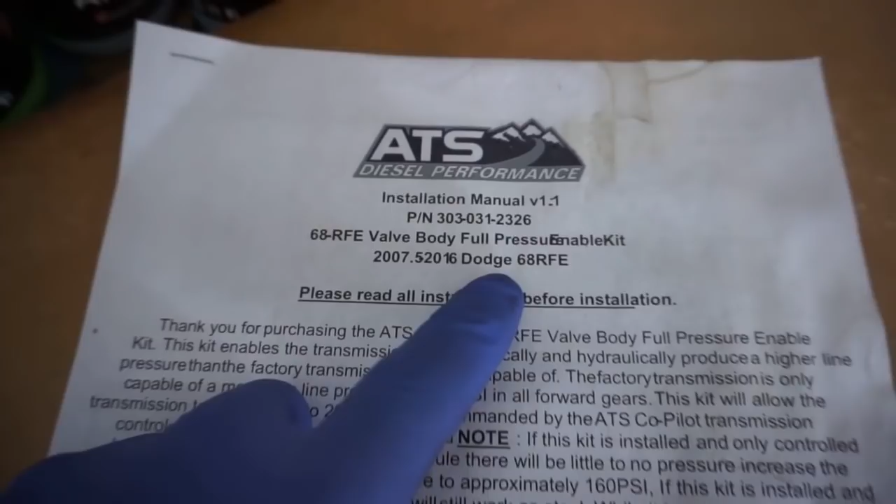What this is going to do is allow us to command up to 295 psi of line pressure for your transmission. I'm going to explain in a second why that is pertinent or relevant.

But right now, as you can see, we have the gasket here. We have a metal plate here, and then underneath that one, there's another gasket. I'm not going to mess with it right now just because I'm not ready to mess with it. We also have an accumulator plate — I believe this is an accumulator plate for the valve body.

Actually, it might be called something different, but ATS, for those of you that know, they're based out of Colorado, all American made, in-house R&D, research and development. Excellent company, I've heard a lot of good things about ATS. This is the first ATS component I'm installing on my truck.

But check this out, I mean come on now — detailed colored instructions, it doesn't get any better than this. You guys know how I'm very big on good instructions and color, because for example, when we did the AMP steps, the pictures were in black and white and it looked like it was typed in China.

But anyways, we're gonna talk more about this when we take the valve body off and have it sit here. Right now, what I want to do is show you guys what else we have, because this will require some stuff. So right now you see a bunch of stuff here.

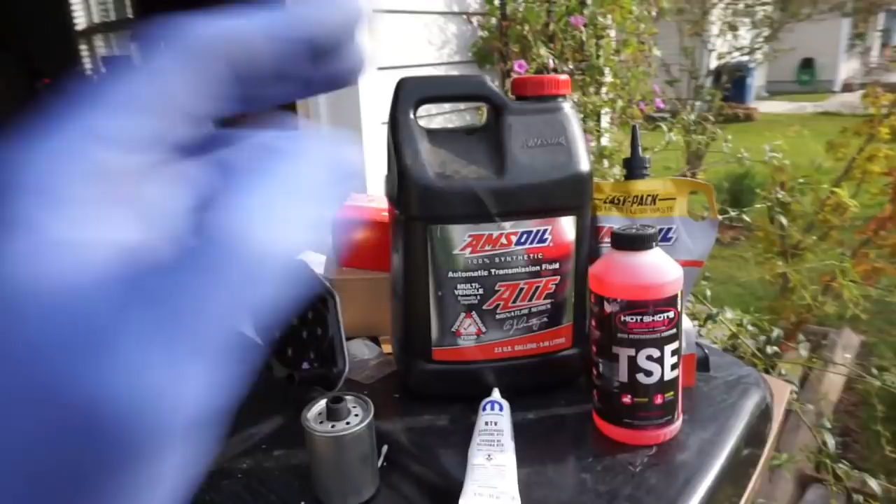We got transmission fluid from AMSOIL, Hot Shot's transmission additive, and another bag of AMSOIL synthetic transmission fluid. If you did not know, 68RFEs take ATF4 transmission fluid. So if you don't want to get the AMSOIL, you can go to your local parts store, Walmart. I've read on forums dudes running SuperTech ATF4 fluid, and it meets OEM specs, so they say they've had good success with it. Don't freak out now.

Yes, I have Hot Shot's. A buddy of mine gave me this because I told him I was about to do this job, and he was like, hey man, you should put some of this in here.

Reason being is because we're dropping the pan, so we're changing the fluid as well. We're not doing a full flush. Only reason why is because my truck runs really good, my transmission is really good. I have no issues with my transmission and it's been holding up like a boss. But there is dirt in there, I'm sure there's dirt in the cooler and stuff like that.

What this is supposed to do is break down all of the dirt and sticky friction and all that crap. It's supposed to break it down and clean it. They say to add it when you change your fluid, so we're gonna do that today, add the specified amount.

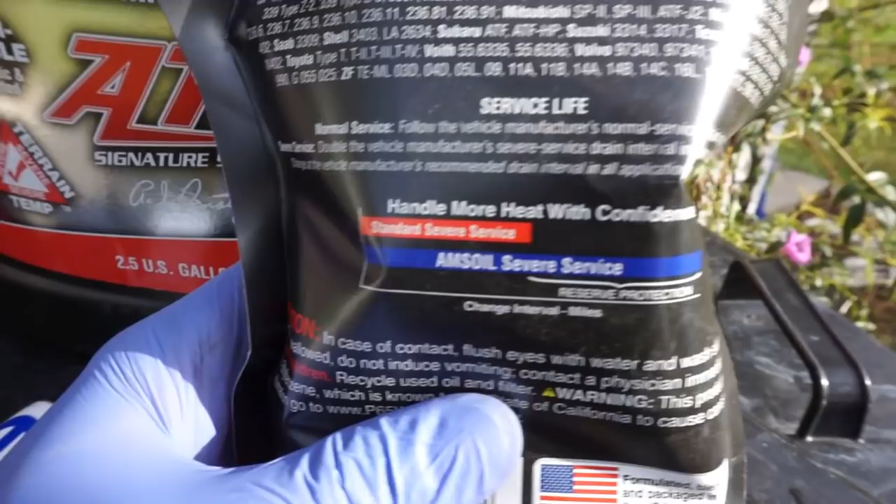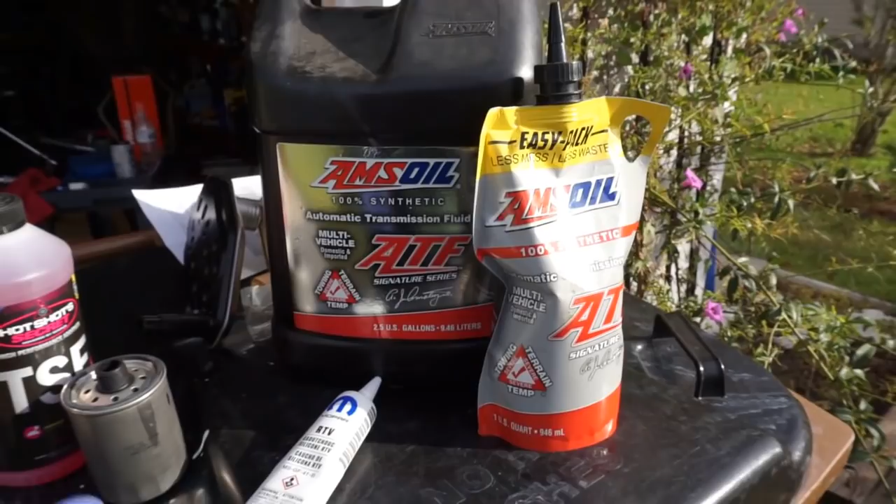But you guys do know that dear to my heart is AMSOIL. AMSOIL ATF fluid is severe transmission fluid, so what that means is, long story short, you get pretty much doubled the severe service life. I believe on the 68RFE recommended transmission intervals are either 60,000 or 100,000 miles, I don't really remember, but you get double the life. It's 100% synthetic, really good stuff.

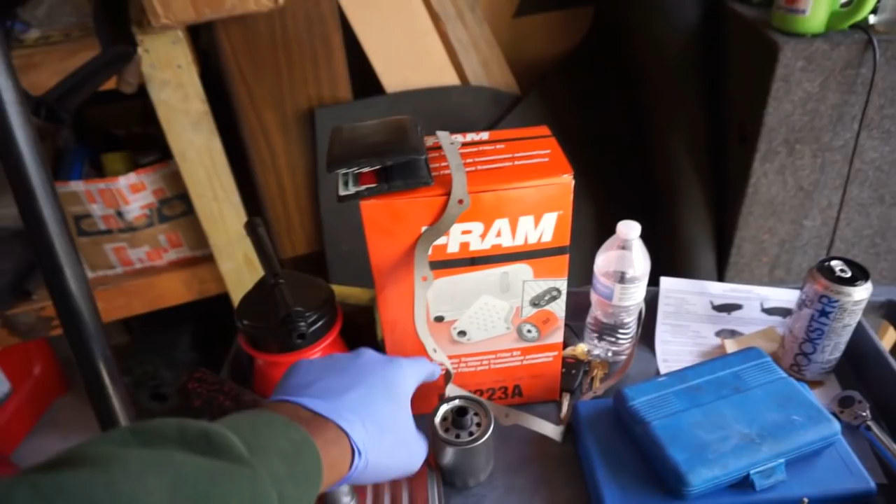First things first, over here, I bought this filter kit a long time ago — not this part, but the two filters. I bought this a long time ago when I originally ordered the separator plate, because I was going to do it way back, and then I had a bunch of stuff come up.

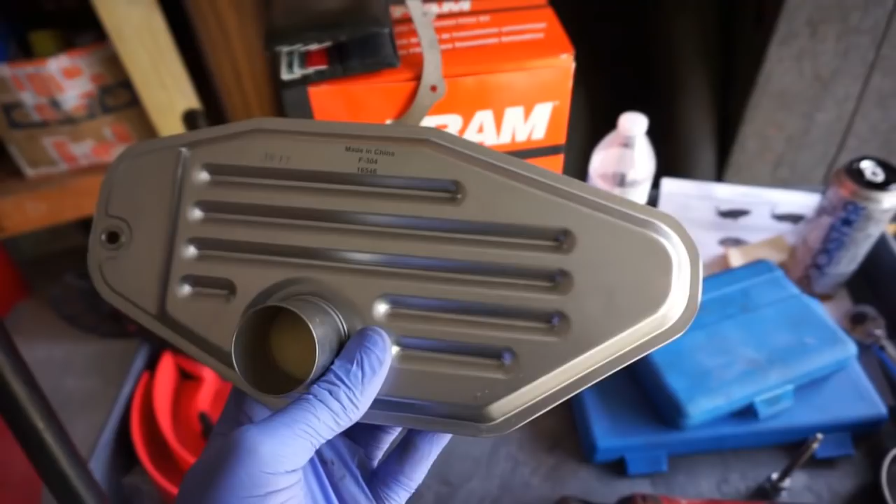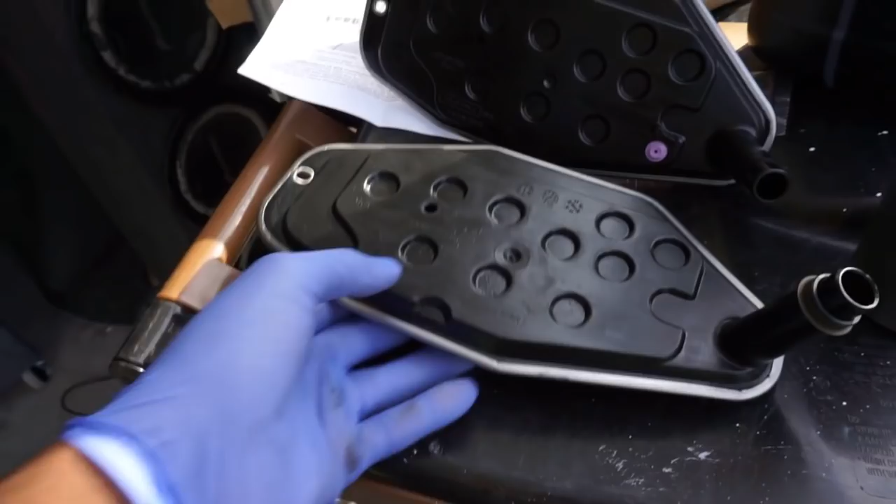Right off the bat, okay, this filter is made in China, okay? It looks very similar to the pan filter, right, the Mopar one. When you get them side by side there is a huge difference within these two filters. Right off the bat, when you're looking at this, the Fram filter is crap. I mean, the glue looks like it's gonna fall apart the minute it heats up. You come over here to the Mopar one, it's clean, smooth plastic. The big thing, the Mopar filter has what looks like some sort of snubber slash maybe like a check valve or a relief valve, some sort. Nothing on this one, okay? So already off the bat, this does not look right.

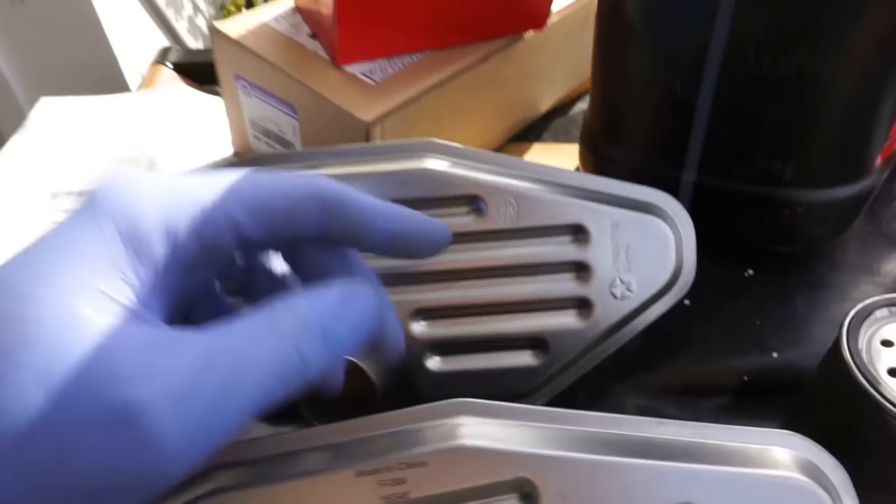On the other side, it says made in China. Mopar side, it doesn't say made in USA, but it does have the Chrysler stamp, and it just looks better. I mean, this right here looks cheap, okay?

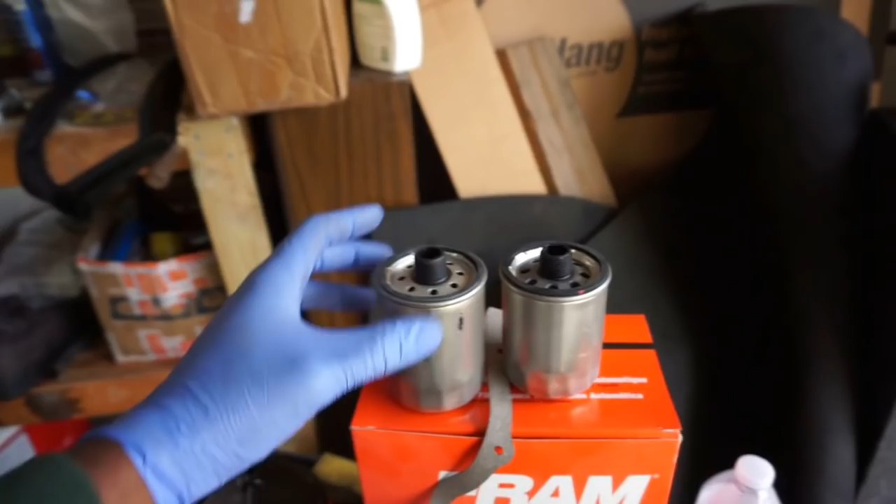That's two right there. Now when you come to the spin-on filters, if you have a two-wheel drive and a four-wheel drive transmission, they're different, okay? Your two-wheel drive filter is gonna have a shorter filter, your four-wheel drive transmission is gonna have a taller filter. This is supposed to be a 4x4 filter, okay? When I bought this online a while ago it said 4x4, 68RFE. Tell me right now if that looks the same height, okay? No, it's not, it's shorter, which leads me to think either they just cheaped out for a 4x4 filter, or they put a two-wheel drive filter in it.

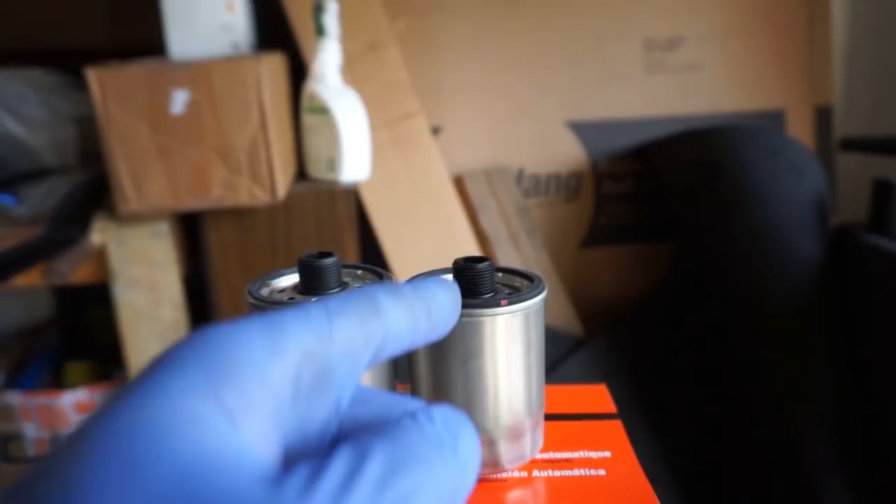When you come over here, this one — well, it's kind of blurry, but there you go — made in the USA, okay? This one, you probably can barely see it because they stamped it like an idiot, made in Mexico. So this is crap, we're not messing with this stuff. This is exactly why I say stick to OEM, Mopar brand filters, etc., if you can.

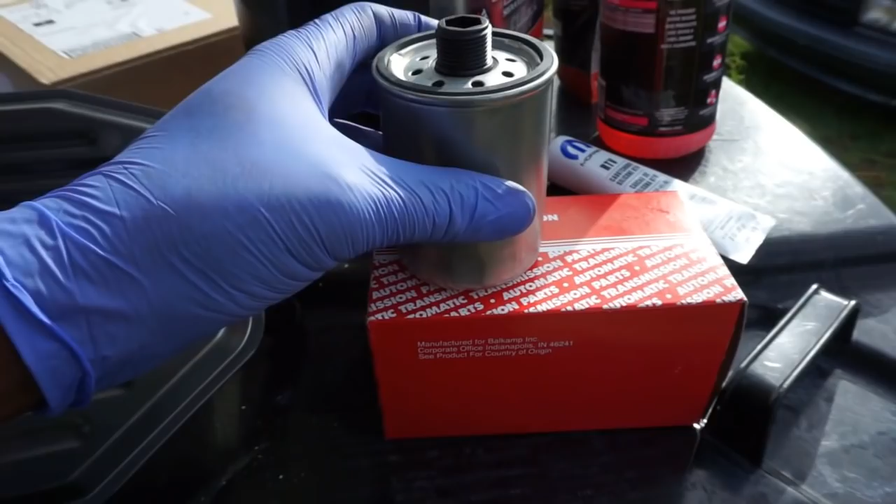Now, this is not a Mopar filter. This is a Napa filter, but it's made in America. I was trying to get a Wix filter because the Dodge dealership was out of stock on these, and I needed one today because they wouldn't have it till tomorrow. This is a Napa filter, but by just doing that simple comparison, I know for a fact this is going to be okay.

I'm not a fan of putting cheap stuff in. This right here, I mean, go over there to recycling, because that's where it's going to go. Get recycled, maybe turned into a soda can or something. I'm just really big on that. So this is a very, very important part. You guys do not want to cheap out and take the shortcut.

Yes, you can get a spin-on filter and a pan filter at the hardware store or the parts store for like 26 bucks, both of them. Don't do it, okay? Unless you get the Napa one here. If it don't say made in the USA, I ain't messing with it, okay? Especially when it comes to internals on the truck.

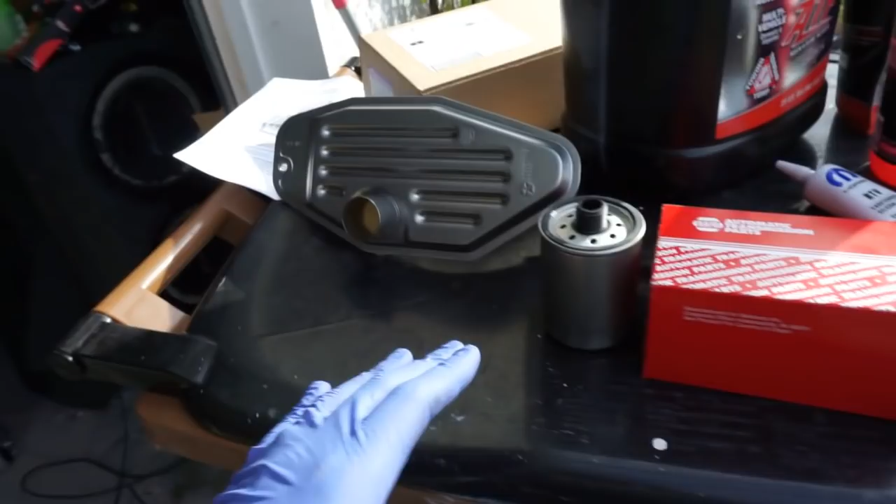So we got that. Tools needed for this job. You're gonna need very minimal stuff. You're gonna need an 8mm socket to take off the pan. It's 15 bolts. I highly recommend getting a magnetic pan so you can just drop all your nuts and bolts into it. Harbor Freight, it's like $1.

You will need a torque wrench to torque the pan back on, and also for what we're going to be doing with the valve body, you're going to need a torque wrench in inch-pounds. So this is a Harbor Freight 20 to 200 inch-pound torque wrench, which is perfect for what we need.

You're going to need a Torx 25 key to take off the pan filter, and you will also need a Torx key to take apart the valve body.

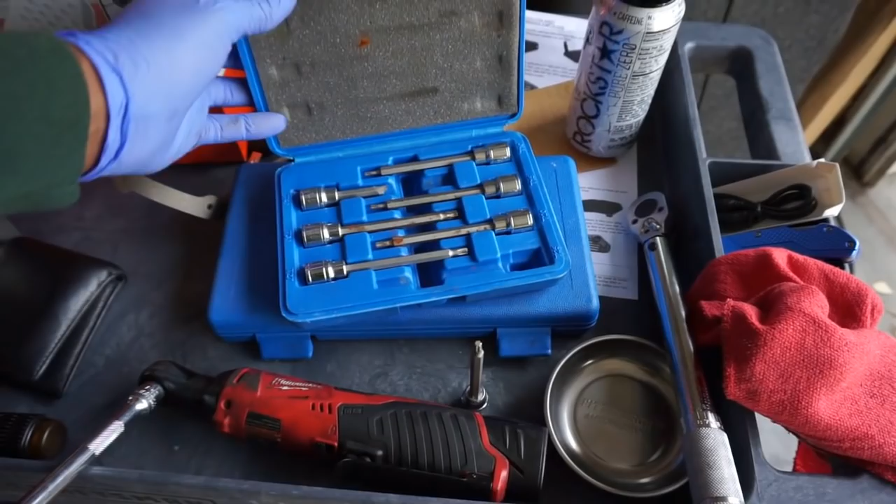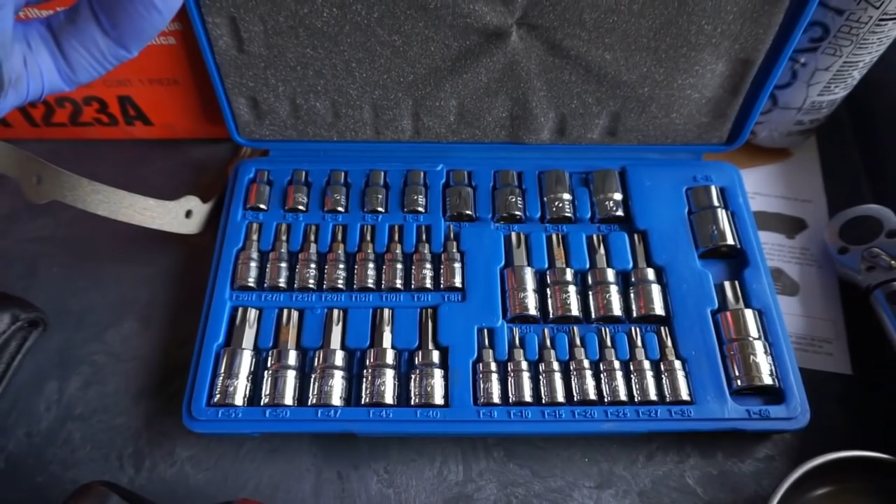You can go on Amazon, and this is where I got mine from. You can get these Torx key kits for super cheap, because for some reason at the stores Torx keys are super expensive. I think I got this one on Amazon for like 10 bucks, and then I bought an even better one with more sizes and different drives, like 1/4 inch and 3/8 drive. That one was about 20 bucks on Amazon. So highly recommend getting you guys one of those.

Okay, so what we're gonna do now is drop the trans pan. I got the truck up to operating temperature. When I shut the truck off about 20 minutes ago, the oil temp was at like 130 degrees, which we should be fine with. I got a drain pan over here, and then I got a creeper.

You guys see that? Yep, we got a creeper my wife bought me for my birthday, so I'm gonna be testing that out today. Now it's gonna be kind of hard for me to film and be underneath there at the same time because I don't have a camera mount that can get under there. Plus my camera's kind of expensive, so I don't really want to get it near all that oil and stuff to mess it up.

So, you know, I'm pretty sure you guys can take off a transmission pan. It's an 8mm socket, 15 bolts, take them all off. Once all of them are out, the fluid will come out, so make sure you're prepared when you take the last bolt out, okay? So I'm gonna go ahead and take the pan off and show you guys what it looks like once the pan is taken off, all right?

So check it out, bottom of your 68RFE, okay? So there's that, there's your pan filter, and there's your spin-on filter. Spin-on filter comes off just like an oil filter on your engine. Just spin it off. If it's tight, you can get an oil filter wrench on it.

Pan filter, all you gotta do is take off that Torx 25 screw, take that out, pull straight down, because there's a snout up here that goes into the bottom of the transmission or wherever. You want to pull straight down, don't pull forward, don't pull back, just straight down. It should pop out. Now there's a seal around that snout.

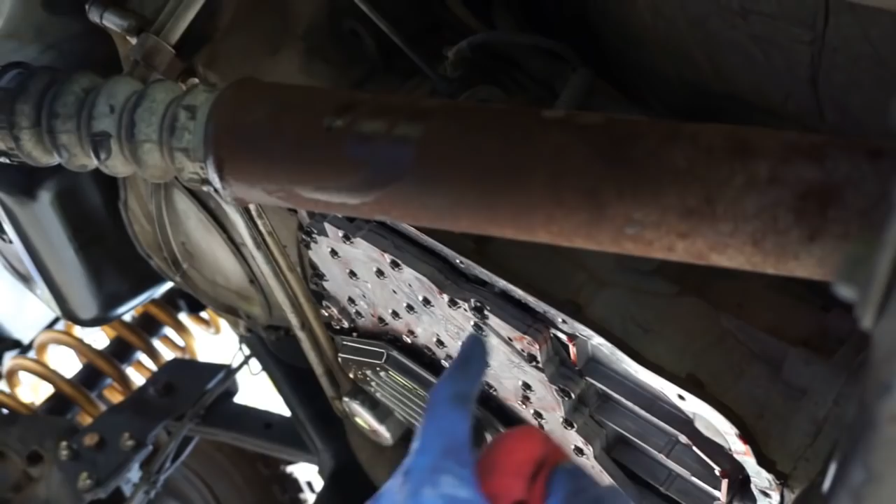If the seal is in there, don't mess with it, leave it alone. You can just put the new filter in and leave the seal. I've read from a bunch of transmission guys, and on the forums everywhere, they say it's perfectly fine as long as the seal's not destroyed. So shine some light in there. It's perfectly fine to reuse the seal for that. There's no issues with that, because apparently it's a pain in the ass to take off, and usually it requires some sort of special tool.

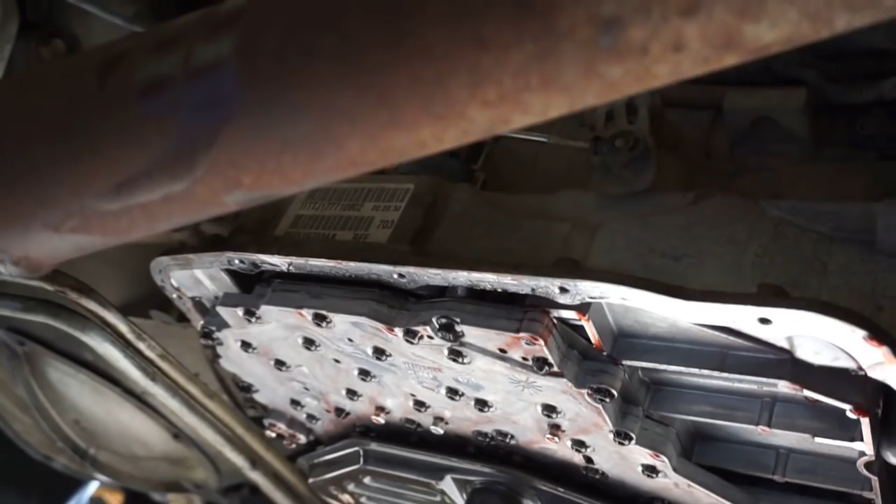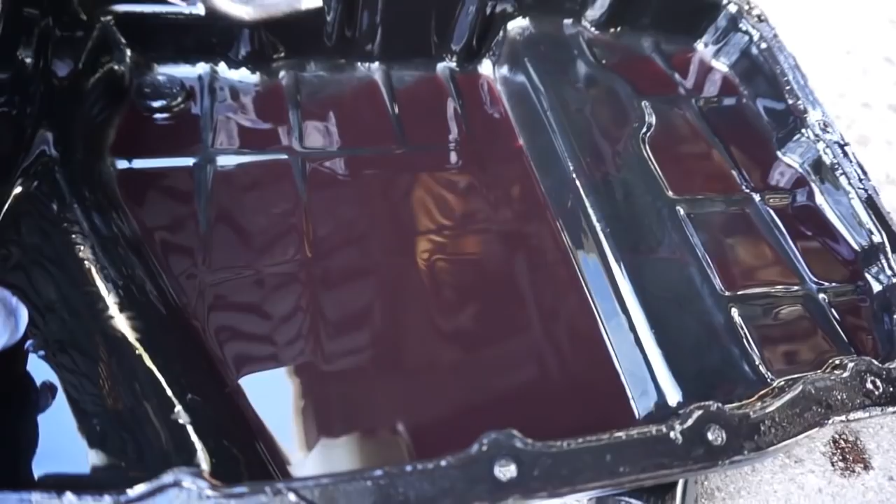So this is it, now I'm gonna let this continue to drip. What I wanted to do was show you guys my oil pan and get your opinion, okay? So this is the fluid in there. The fluid is not bad, it's red, it's not black, which is good.

There's a little magnet, one second, let me reposition myself. So I did a little finger test right there to see if it was truly good. It looks like it is.

Just typical transmission dirt, I guess. Now the question I have for y'all, any of my transmission experts out there, this is the magnet, right? Now there's a good layer of stuff on there. I'm pretty sure this is normal. I don't see any... there's a little shred there, a tiny little piece of metal, but most of it's just regular, it's all mushy and stuff.

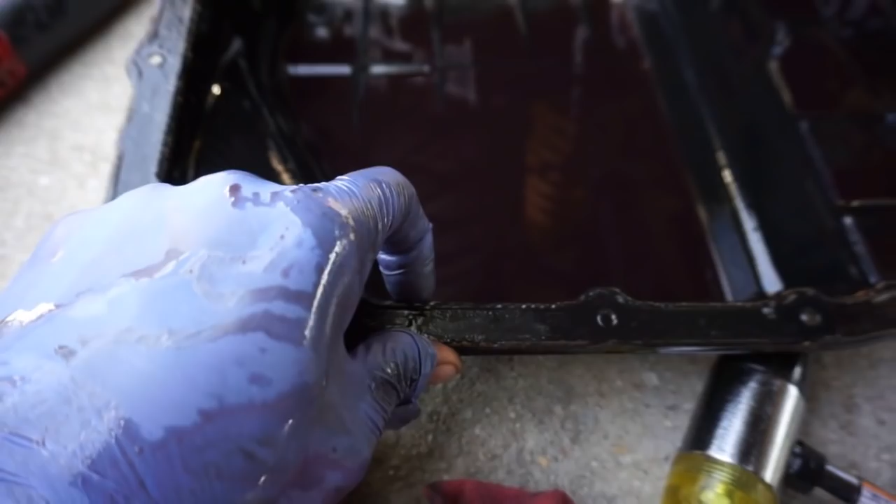I'm gonna clean this pan up. Now there was no gasket on here, no rubber gasket, it was all RTV, which I have. So I'm just gonna clean this up real good. Get a little wire brush on it just to kind of gently scuff it up—not scuff it up, but just get all this crap off. You have to get all this stuff off, because if you don't have a clean mating surface, it's not good, and you're gonna have a leak pretty much, okay?

Do not use any abrasive materials on the transmission mating side. Don't use a wire wheel. Just take your time. If you've got to use a rag with some brake cleaner and rub it in, but you don't want to be scoring or gouging into the surface of that, okay? Because once again, that can cause leaks. So definitely, all right, I'm gonna go ahead and pour the rest of this in the bowl.

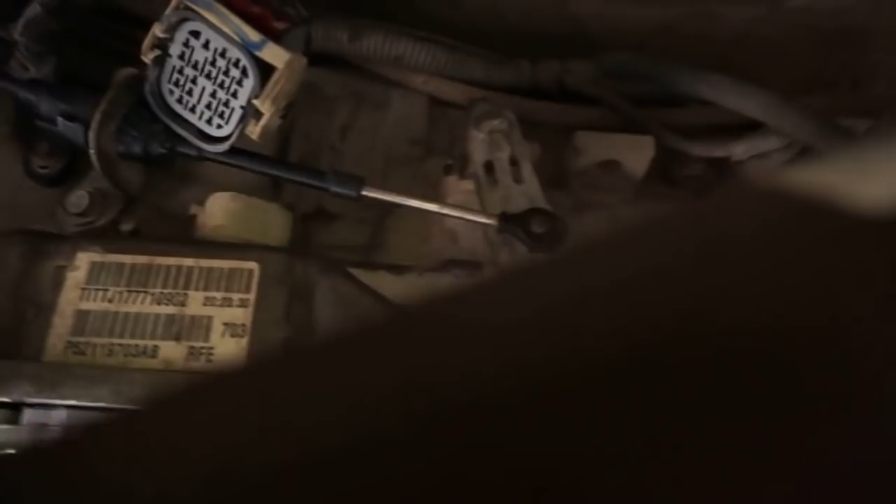So we're up here inside of here. If you're on the driver's side of the transmission, that white plug there that's unplugged is your solenoid pack connector. If you've never taken it off, or if it's never been unplugged since the truck was built, it will be kind of hard to get out.

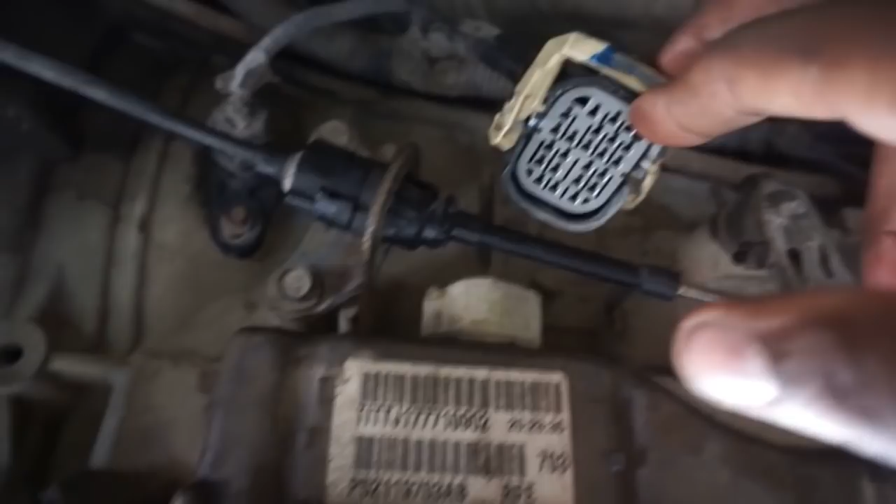It takes a little bit of wiggle time, but don't get frustrated. Do not pull this harness from the wires, because if you pull one of those wires out from the back of this and mess it up, it's a bad day, okay?

So do not pull from the harness as much as you want to. It's gonna suck doing it, but the easiest way is when this is installed, you gotta slide this red tab down and then press—there's this black tab up here, press that in and slide this lever, this lever swings down, slide it down, okay? Once you do that, it's gonna be a little tricky because your shift cable is gonna be in the way, but just take your time.

What I recommend is before you put it back on, just get some dielectric grease, or some Vaseline, or even a little bit of motor oil, only on the outside, around it. Put a little bit of it around it, so that way in the future, if you ever have to take it off, I would do dielectric grease for this one. Just put it around there so that in the future, if you ever need to take it off, it's super easy. Because it probably took me about 15 minutes just to pull that out, okay?

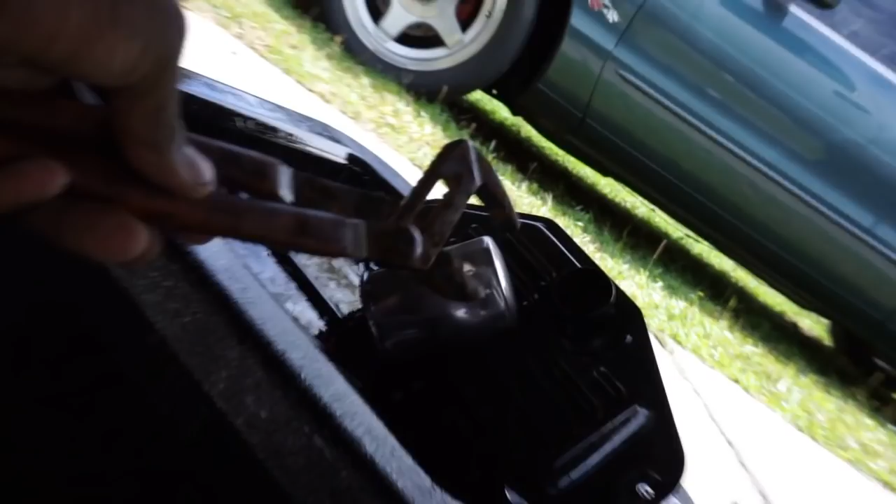So we're at the point now, we took off our filters. If your spin-on filter is really tight, you can get some channel locks. I just opened it to the widest mouth, I got some big channel locks, wrapped it around there, and you can see there's a little dent on there.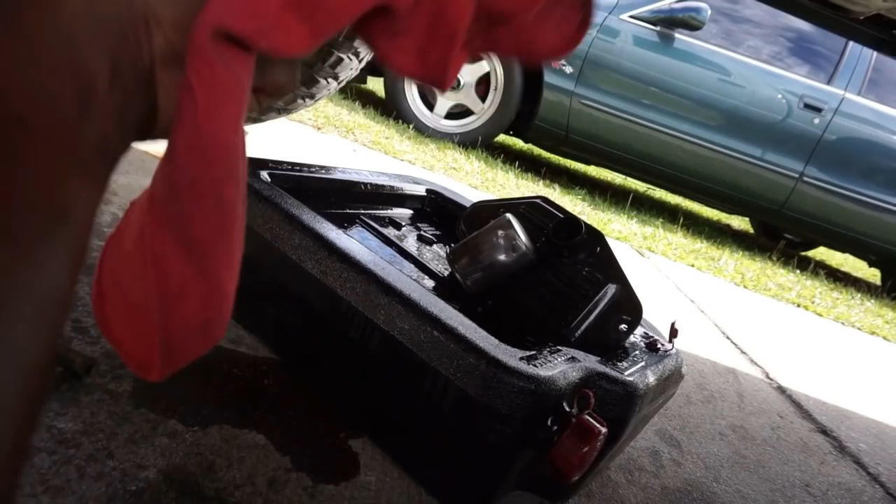So this can is really soft. When you go to squeeze it with channel locks, do not gorilla squeeze it, just nice. What I did was get a rag, wrap it around the channel lock teeth, then put it on the filter and just take it off. Take your time, slow steady pressure, and don't squeeze it, because if you fuck that up and can't get it off, that's a bad day.

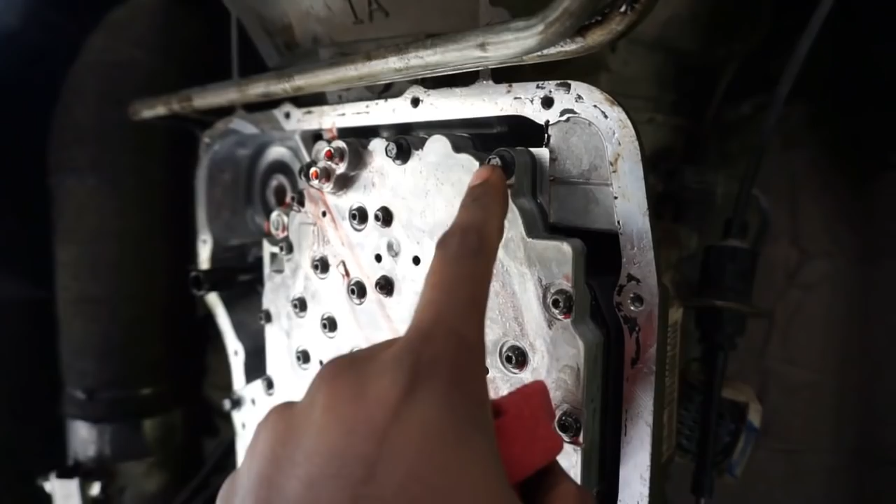Take the valve body off. It's super easy, there's 6 10mm bolts down here. So you got 1, 2, 3... where's the next one? 4, 5, and then 6, I think. Did I count that right? 2, 3, 4, 5, 6. Yeah, you got 6, okay? They're all on the outside.

When you take the last valve body bolt off, make sure you're supporting the valve body because it can drop out. The last thing you want to do is drop your valve body, damage it, and then you got to buy a new one, $500, or if you're going to get a good one, $800, $900, $1,200 valve body. So make sure you're supporting it, okay? They're 10mm bolts. I'm going to go ahead and take those 6 bolts out, and we're going to drop this valve body. All right, you guys, the valve body is out and it is on my workbench.

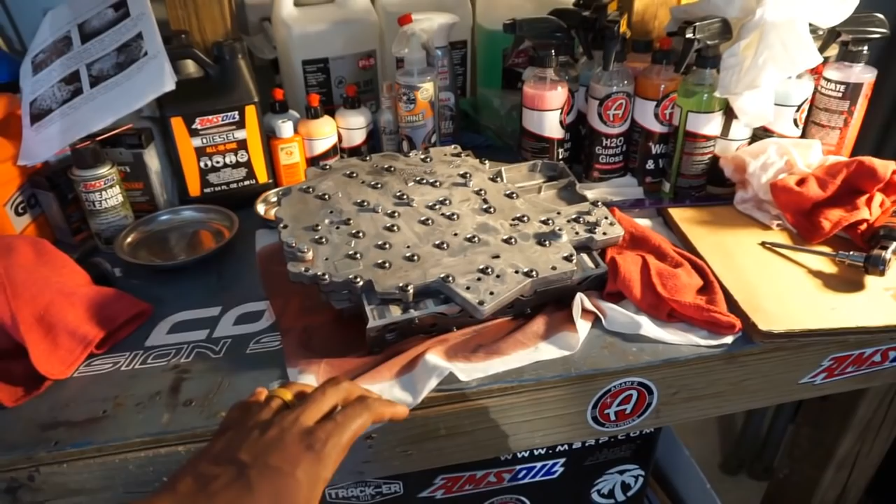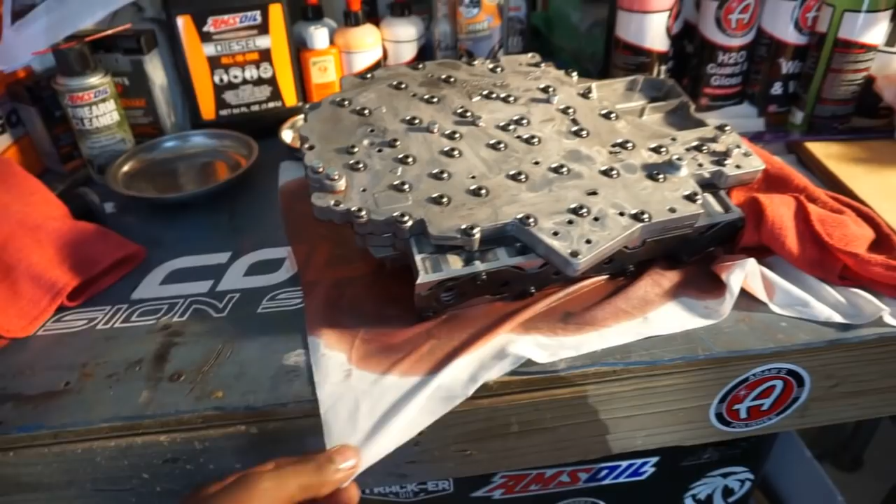Real quick, before you start, make sure you have a dedicated clean space set up ready to put this on. You don't want to put this on a dirty bench, because whatever gets on this is going back inside your transmission. So you definitely want a clean workspace. You can see down here, I put lint-free rags. If you don't have lint-free rags, you can get them on Amazon, like 50 rags cheap. Lint-free rags are good because they don't spread lint, hence the name.

So I just finished reading through the instructions. These instructions are very, very understandable. Do not be freaked out, you guys, looking at this and seeing all these screws and stuff, because we are going to be taking them out. Don't freak out, it is really not that complicated.

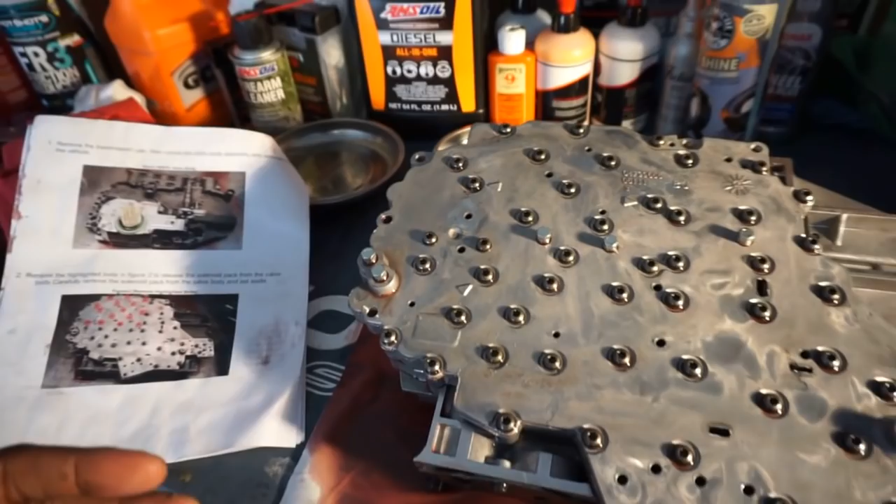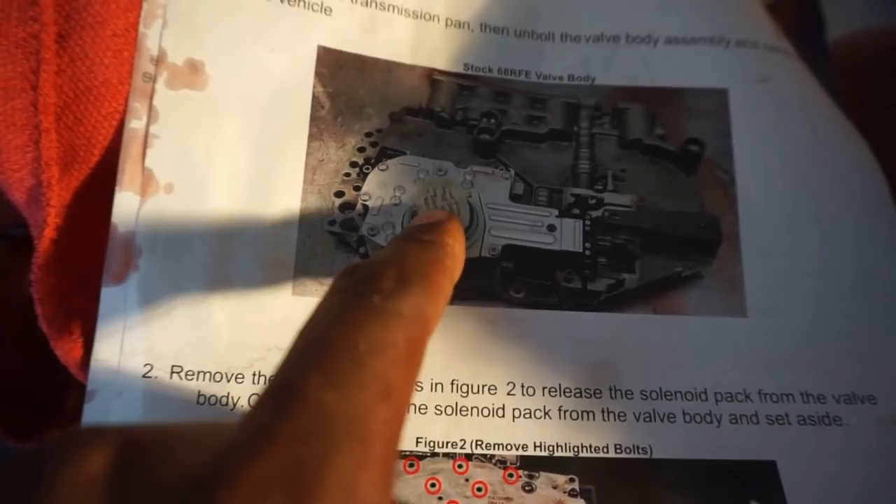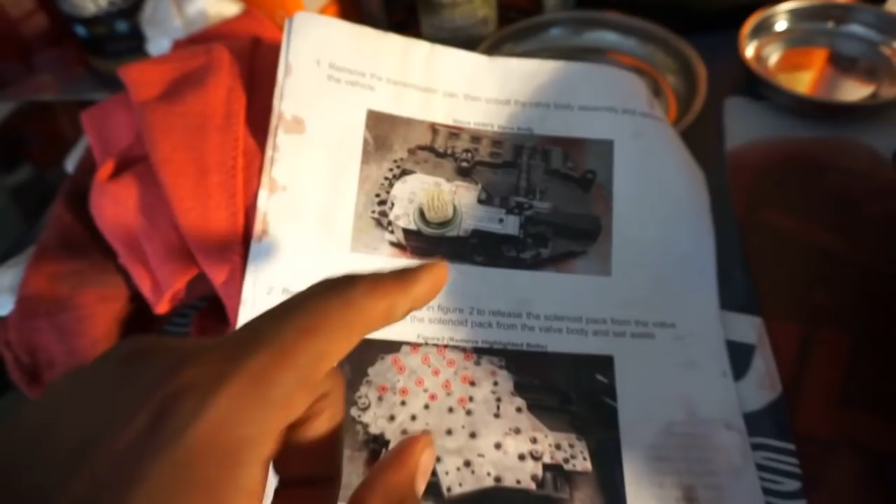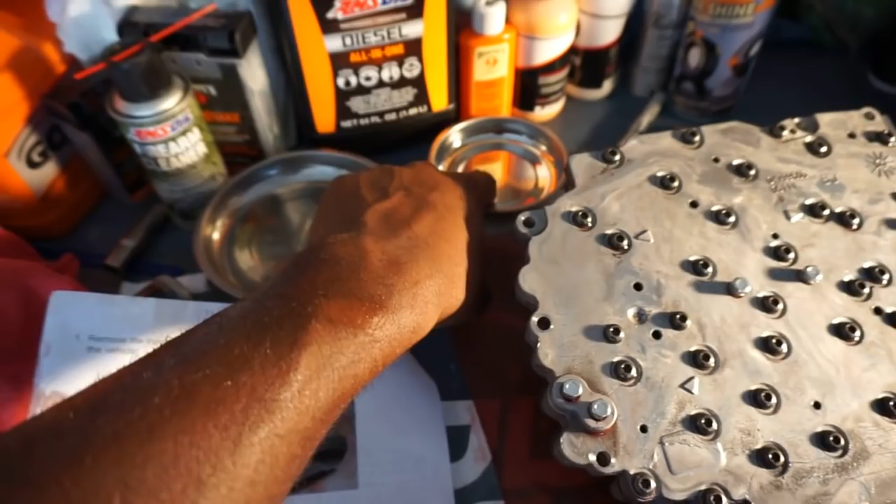Luckily mine is white. What I went ahead and did, we're going to be removing the solenoid pack, and all you got to do is loosen and take off all of these screws. Now what you don't want to do is mix up screws. They're all T25 Torx, but they might be different lengths. So these red highlighted screws I'm going to be putting in this pan, and the rest of them I'm going to put in this one. That way everything goes back exactly the same way.

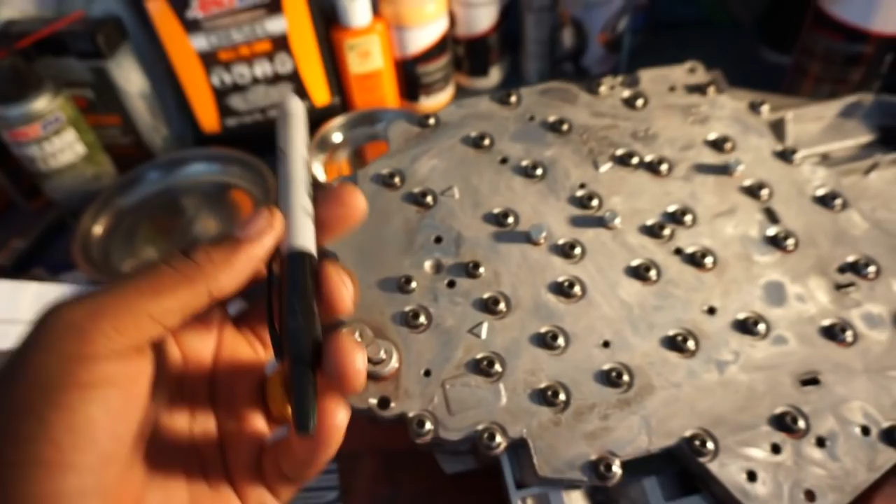Something else that might be helpful, I got a Sharpie, but get yourself a paint marker of some sort, so that when it's time to torque this stuff back, every time you torque one, you just put a little mark on it. That way you know you torqued it, because it can be really easy to mix up while torquing this. So I've already loosened these up, I can spin them. I'm gonna go ahead and take this off, and after that I'm gonna follow the next steps. I'll get back with y'all once I do that.

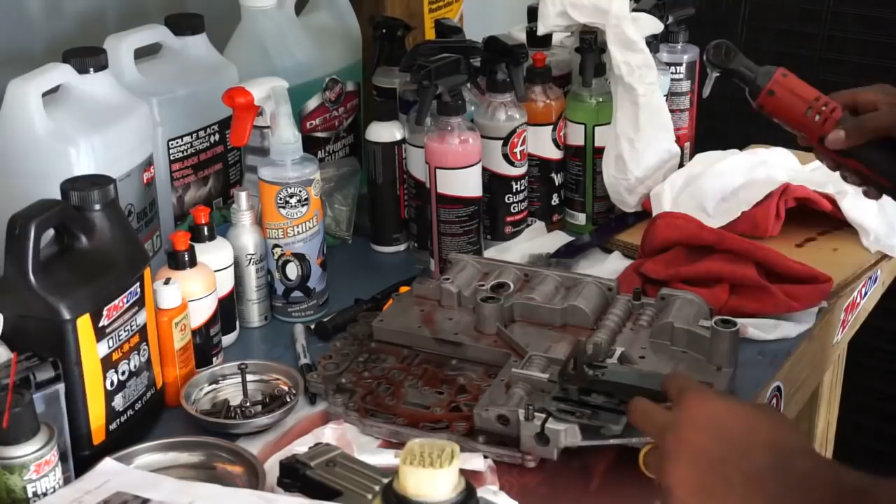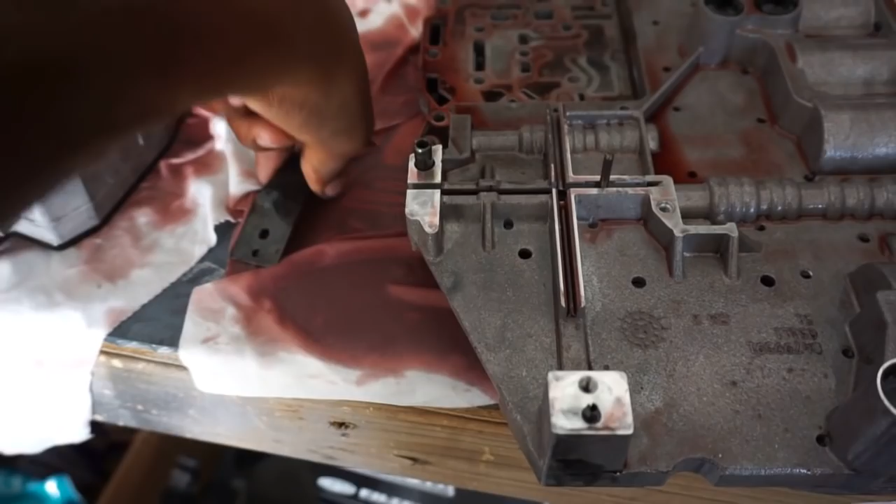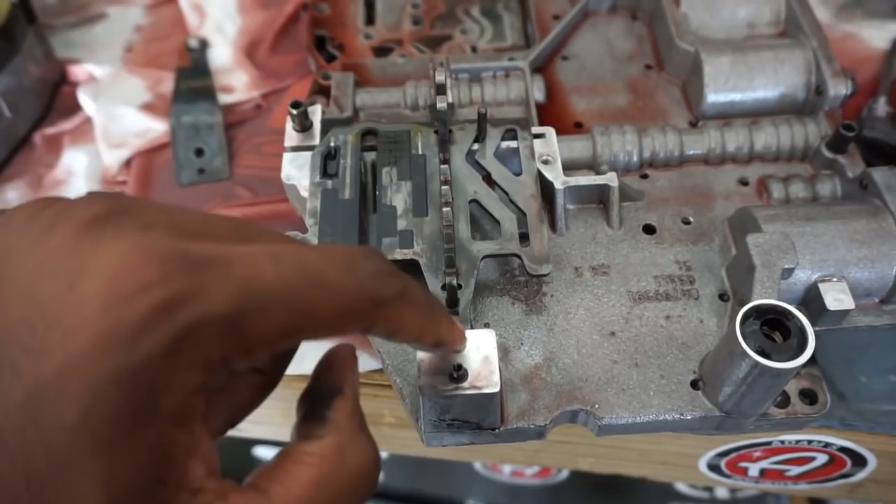So the solenoid pack is removed. After that, I removed the shift selector plate, I guess is what it's called. All it is is this little tang, it sits like that, and then this tang sits on top right here. All you do is remove the screws, and then I put them right there - do not mix this up because this one is shorter than the rest, okay? So I put those there to keep them separate.

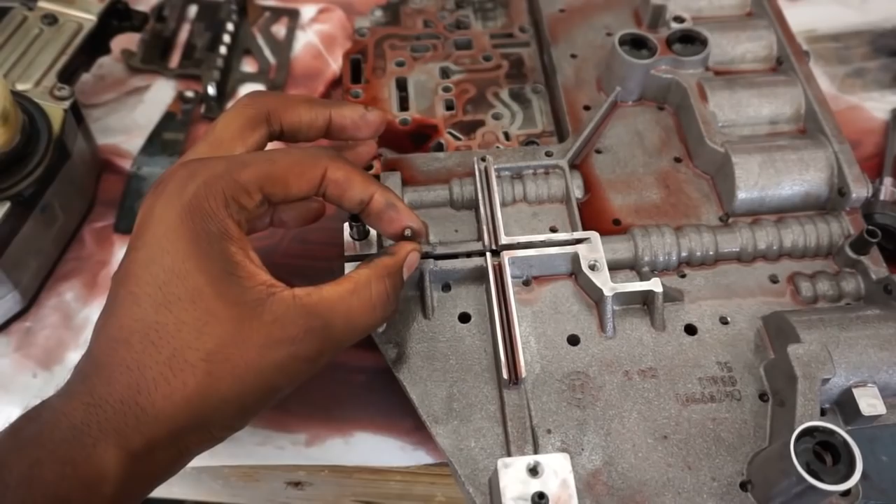So now we got this out of the way, and now we're going to remove what's called - carefully remove the pin as follows. So we're gonna slide this out like such. It says carefully remove it, so I'm just gently, I'm not forcing it. You just take your time, pull this pin out, just like it says in the instructions. Don't want to do nothing extra, nothing less. And we're gonna set that aside right there. This is super simple, you guys, okay? So now what we're gonna do is turn it over and take the rest of the screws remaining off, and that's gonna allow us to access the separator plate. Super simple, okay? Just wanted to let y'all know.

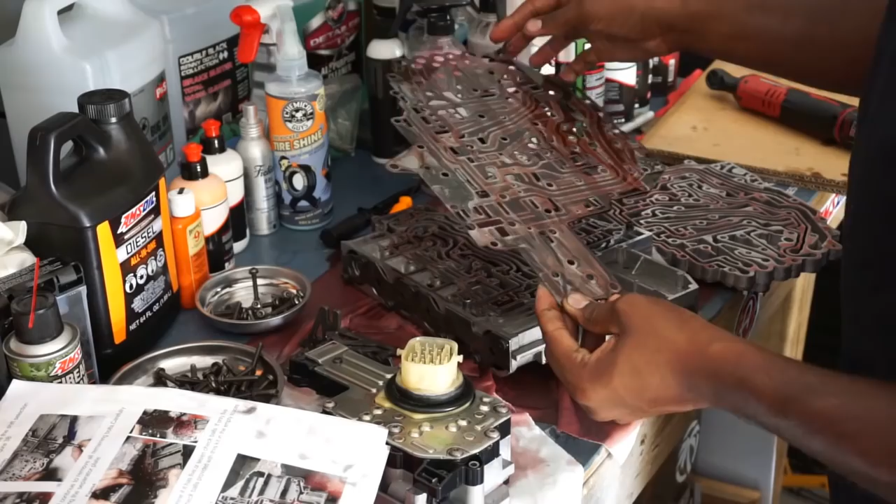So I was just reading the instructions again.

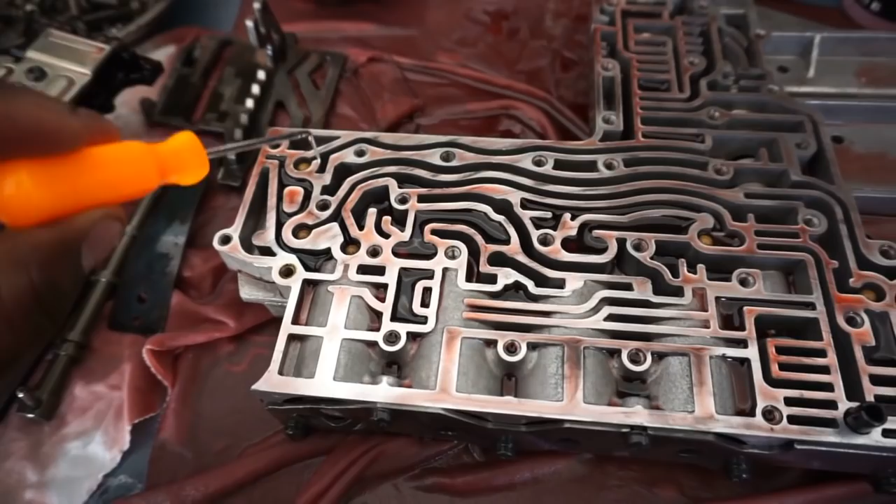Okay, check balls, here we go. So ATS tells you on the previous page you should have 7 check balls. If you have 5, like on the 2010 to 12, you need to put the extra 2 ATS provides with this kit in the spots they tell you to. So right now you got 1, 2, 3, 4 - one's in here, you just can't see it - 5, another one's in here, you can't see it because there's fluid in there - 6 right there, and then 7. So those are your 7 balls. No idea what they do, but apparently it's important that you have 7 when you do this mod.

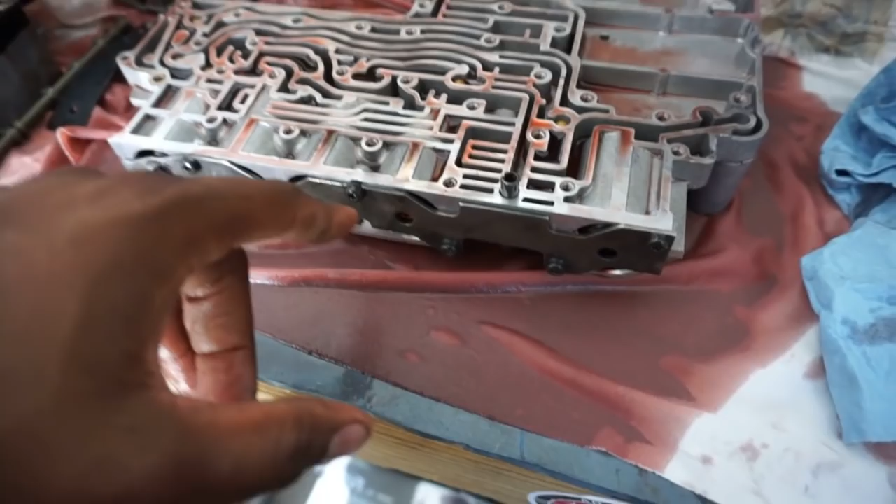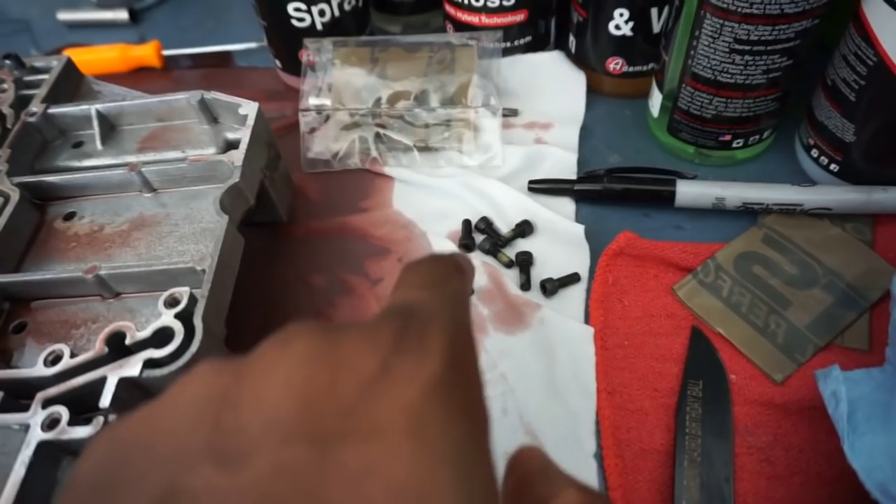Next, what we're actually going to do is remove this stock accumulator plate, which is super thin - you guys can see how thin that is. And we're going to install this beefy one, side by side. Oh my goodness, it's like twice the thickness. This thing is solid, man. We're gonna swap this out, put that on, okay? All it is just the Torx keys. Once again, ATS provides new screws to use because apparently the lengths on these are different. Since this is thicker, you don't reuse these - use the ones ATS gives you, okay? So I'm gonna go ahead and put that on.

Alright, you guys, so I just got off the phone with ATS because in their instructions they don't say what to torque your accumulator plate to. So I gave them a call and they were super friendly customer service - 88 inch-pounds, so get you a quarter inch torque wrench, preferred, and we're going to torque these to 88 inch-pounds. And when we're torquing it, we're going to torque from the middle out. It doesn't say to do that, but that's just how I roll, you know what I'm saying? So better safe than sorry.

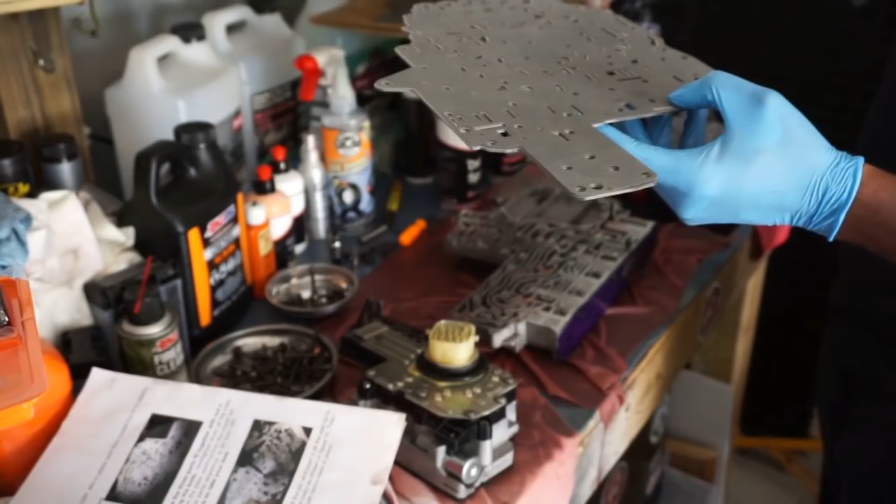So we'll go ahead, you guys. In my left hand here I have the new upgraded - we'll just say valve body plate. Okay, god damn, this thing is leaking, I should have wiped it down. As you can see, I do have the gasket on this one because I don't want to remove it. But you can see, I don't know how good you can see - oh yeah, you can see that. Look how thin the top one is, the old one, bottom is the new one. Look, oh there it is right there, that's perfect. Look at the difference in thickness. This is what comes with a stock 68 transmission, okay?

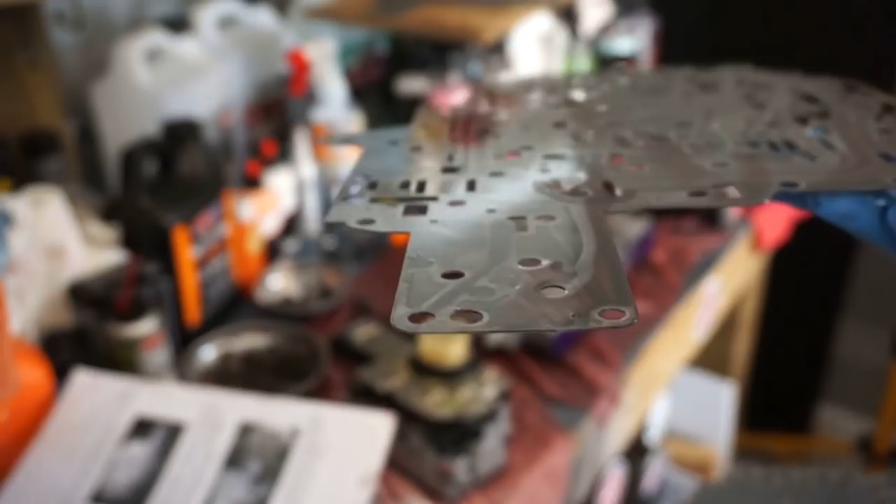And I probably didn't mention this earlier, but this is what causes what's called cross leaks. So pretty much the stock 68RFE transmission is only rated up to a certain amount of power, okay, you can't get much more out of it. So what happens is when you slam on your pedal, your transmission needs more pressure to apply to the clutch packs. It won't get more than 160. Today we'll be able to bump this up to about 250-ish using the Minimax. So this is going to be a nice upgrade. I cannot wait to put this on.

So now this is good, accumulator plate's on. Now we're going to go ahead and reinstall the plate with the gasket and then go from there.

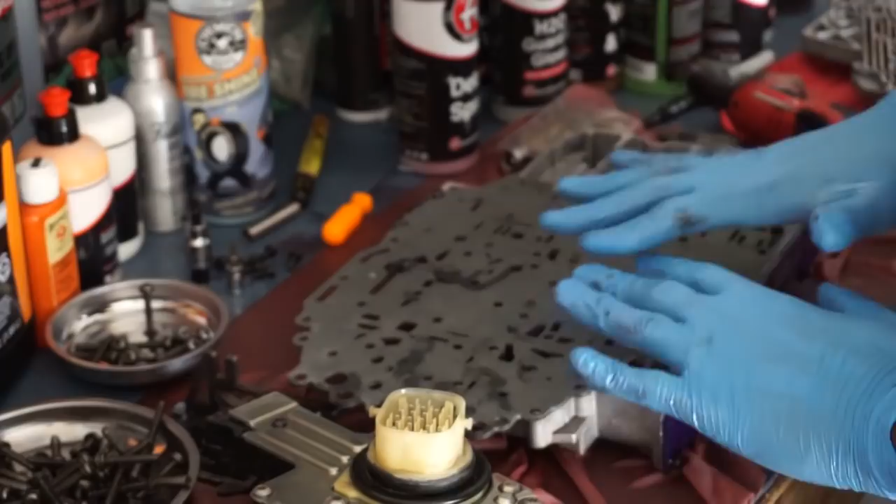You should have a nice seam all the way across. There should be no gaps. It should just be a super easy install, you guys. Very, very easy up front.

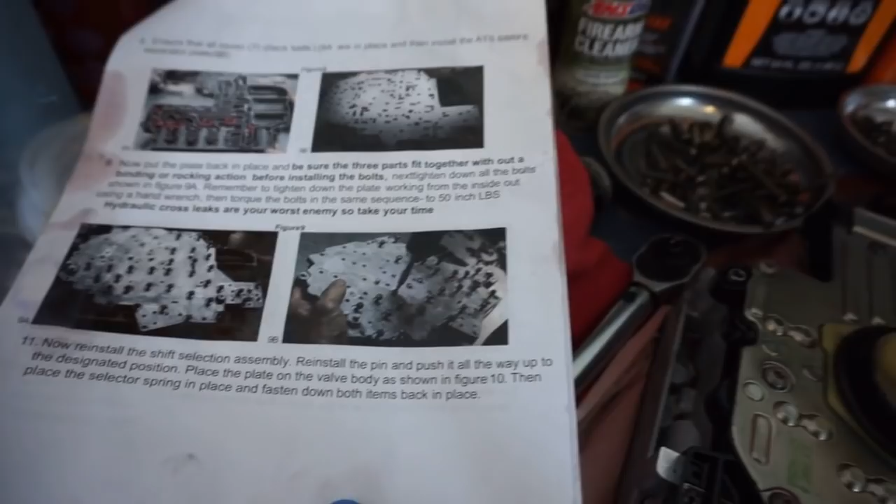No trickery to this. You can see here I have this Sharpie, this is my little border I drew to let me know that those bolts are for the solenoid pack. Everything outside of it is going to be these long daddy bolts, okay? You can also refer to the images again on here, but for me it's just, I don't know, I'm weird like that, okay?

So I'm gonna go ahead and get all these bolts in. I'm gonna run them down. I'm not gonna torque them because I want to hit up on that, and then I'll get back with y'all.

All right, you guys, so I went ahead and reinstalled all of the hardware into the correct position. Once again, if you don't remember where, you're not gonna remember first of all, but if for some reason you did and then forgot, just look at the picture, it has every hole that this goes into. The best way to do it too is orientate the picture the same way it looks, set it up like that. So right now, the way this is facing in the picture is facing just like that in front of me, so that way I know, you know what I'm saying? It's easier, man. Make it easier on yourself.

So now what we're gonna go ahead and do is run down these bolts. Now, they recommend using a manual ratchet or socket, just because you don't want to over torque it, the torque's only 50 inch-pounds. So this is a variable speed, not one speed, so I can run it down safely without over exerting it.

So I'm just gonna go ahead like that. As soon as it stops, I don't go again, like that. And what you're doing is working from inside out, same way when you torque it. And what I have here is my yellow paint marker. Every one I torque to 50 inch-pounds, I'm gonna put a yellow dot on it so that way I know for a fact it's torqued. Cool?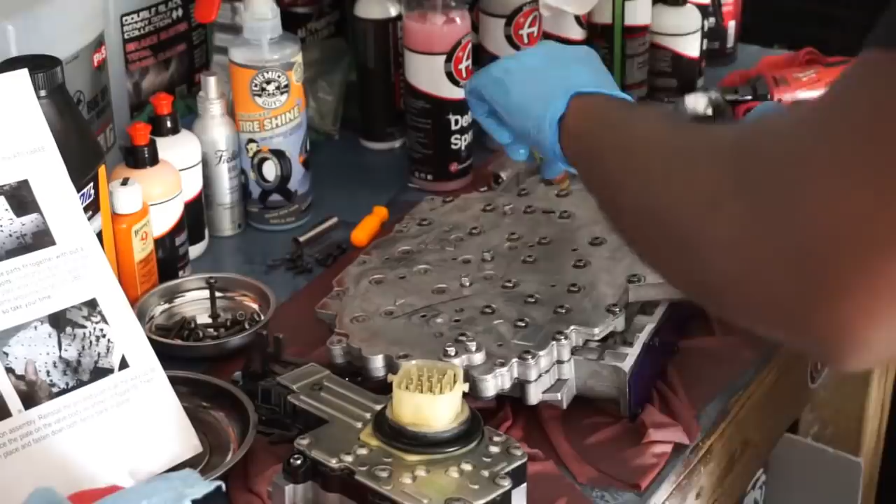As you can see, I went ahead and torqued down all of them. Clear as day, this is why you do this, makes it so much easier. I mean, I 100% know confidently that I torqued every bolt because y'all saw what I did, man. I ain't gonna keep talking about it. All right, so now make sure you wipe off the yellow paint marker, obviously. You don't want that mixing with the transmission fluid.

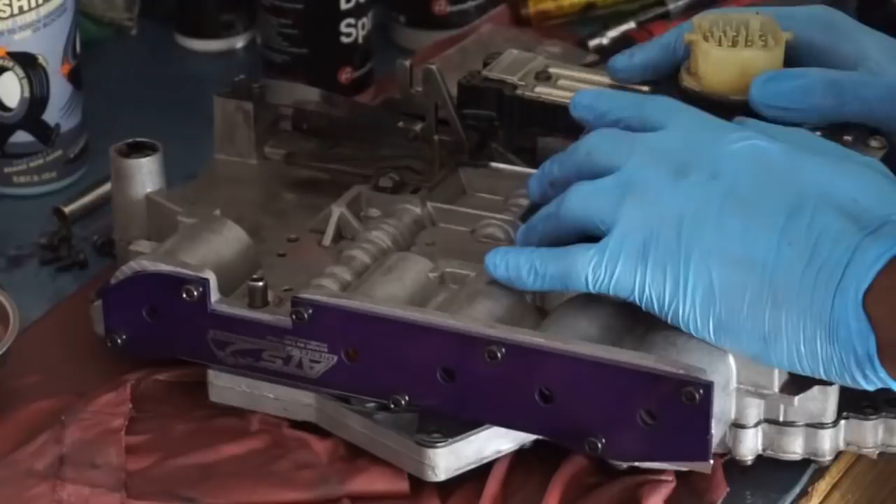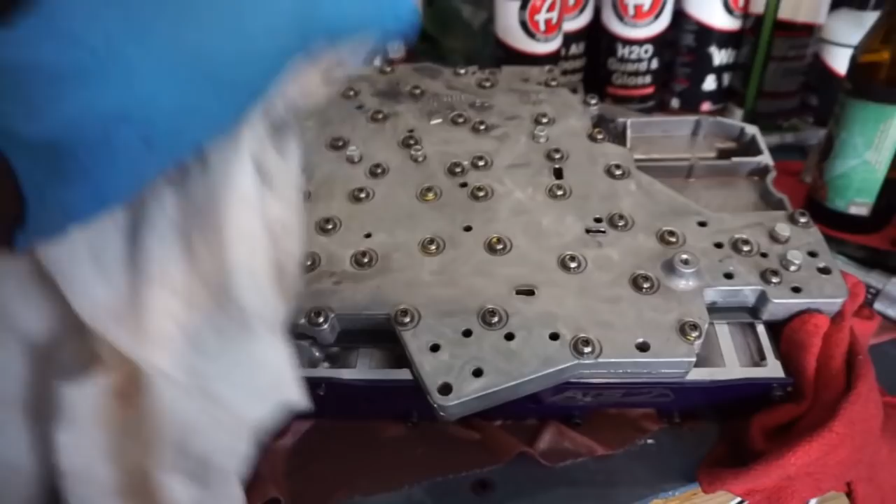All right, you guys, so went ahead, everything's done, ready to get installed. I went around, you can kind of see a little bit of paint marker on there, I try to get as much of it off. So at this point, we are underneath the truck. I reinstalled the valve body onto the transmission.

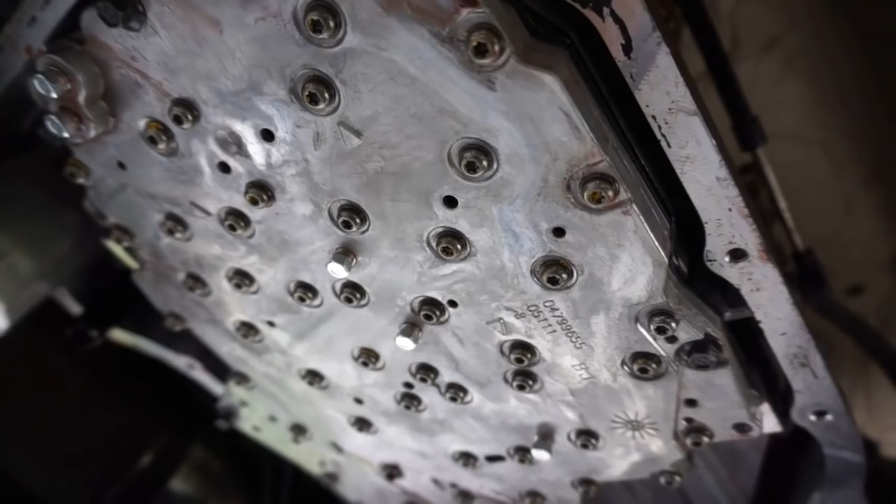Really one key note, when you're installing it, make sure, I think I mentioned this earlier, before you put it on, make sure that shift selector lever is all the way forward. So this is the back of the truck, make sure it should be all the way forward, I believe, yeah, forward towards the engine. Because what's going to happen, and you'll see it and know when you take it out and put it in, if it's not lined up, it'll go in, but it's not going to be right.

So what I did was I put it on, and then I went up into the truck, put the key in. I didn't start it or anything, I just turned the key forward so I can move the shift lever, and I shifted it back and forth, and what I was listening for was that distinctive clicking sound that it makes. That's telling me that it's engaged. And when you shift it, it should be just like as if you were driving.

So from park, you should be able to go down through reverse, neutral, drive, and back up, all four. If it's in park and you pull it down and it only goes down two times, it's not in the right position, so that's an easy way to check. That selector lever is what's making that popping, that's what the detents are. If you're not feeling all three detents from park down to drive, you know you're not in the right spot. But I didn't touch the parking lever, I just made sure the lever was all the way forward as if the valve body was already installed. That's one key note.

All right, we're finally getting ready to put the transmission pan on. For those who didn't know, I'm using Mopar's recommended RTV, part number MSGF41 Bravo. When I went to Dodge today, they told me this is it. So what I'm gonna do is apply a bead all the way around here.

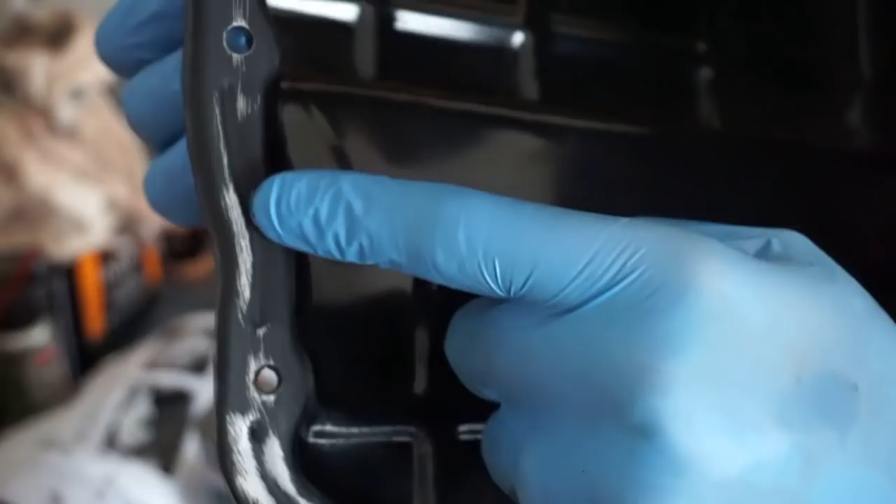Take note that in the middle of the pan, if you have a stock pan, there's a divot on the inside. When you take this pan off, you need to make sure you get in there and clean that out, because if you have old RTV, you're gonna have a bad seal. You want a nice seal. So I'm gonna put a bead fat enough to fill in that divot, then put a bead on the outside and inside of the hole.

Once again, this is recommended for transmissions, so you don't have to worry about it melting off and destroying it. It's not gonna do that, because when I took this off, it had the black RTV on it and transmission oil all over, and none of it melted or was all over the place. So we're gonna go ahead and apply it now.

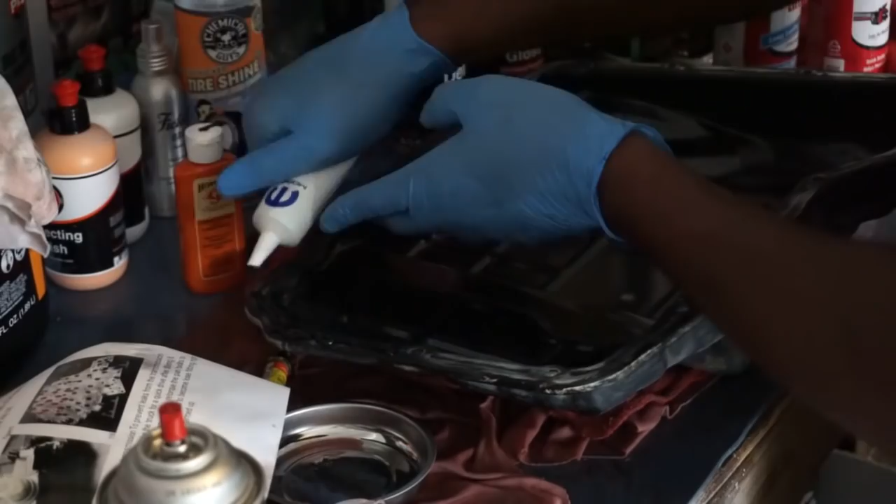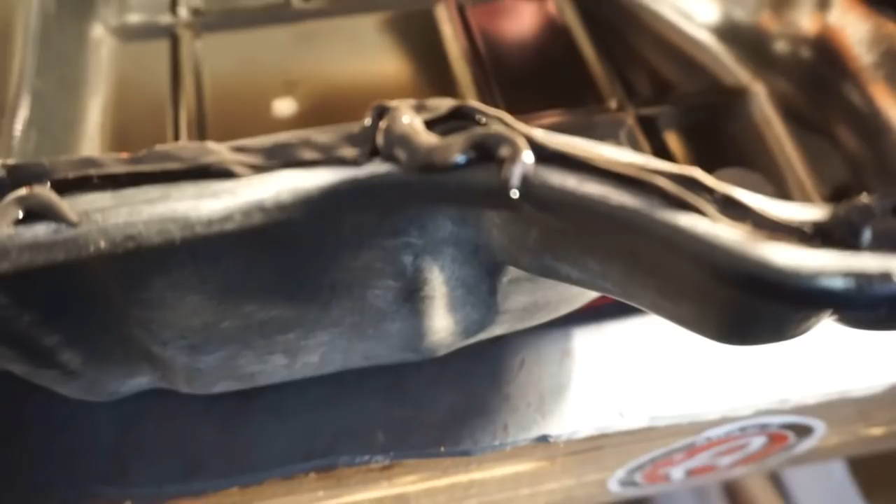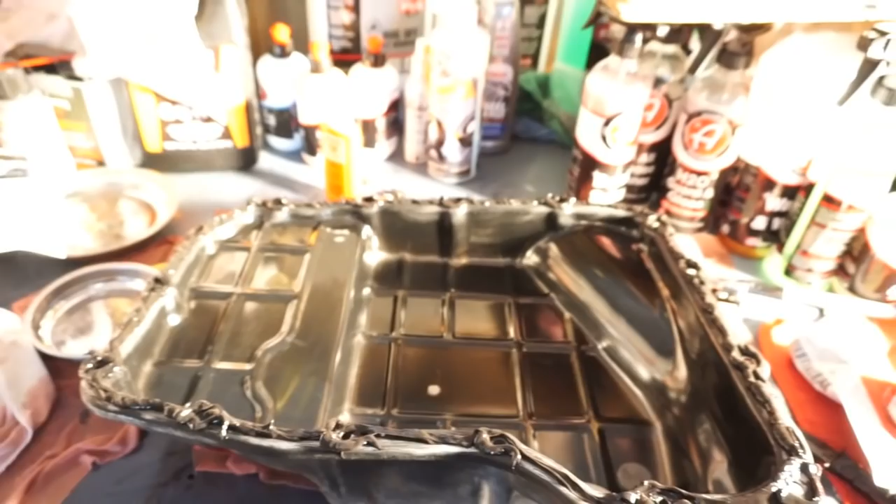So I went ahead and put RTV on. I might have went a little overboard with it, but whatever, it'll buff out. Pretty much as soon as I put it up against the mating surface, it's gonna spread everywhere. I'm doing this because I'm just that type of person. I'm going to wait about 45 minutes to an hour before adding transmission fluid so this can cure. Will it cure in an hour? I don't know, but I'm hoping that it will.

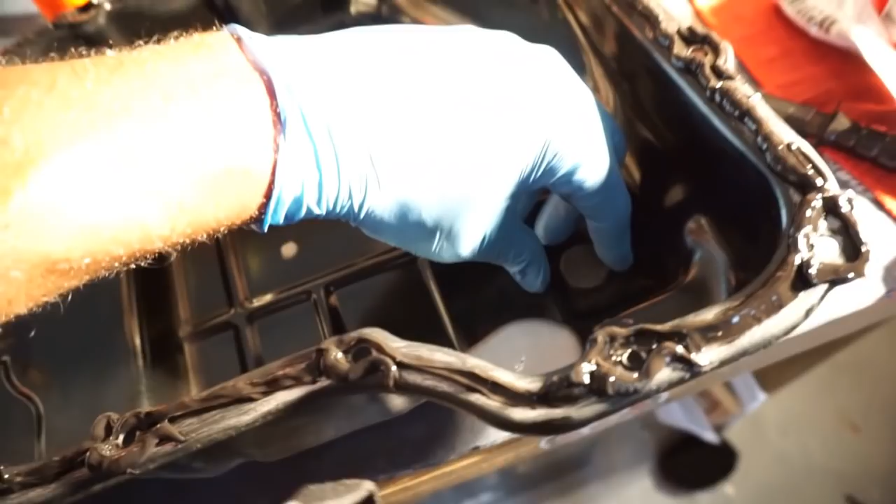One more thing, make sure your pan is nice and spick and span clean before you put it back on. I cleaned everything using this AMSOIL engine degreaser. I know I'm an AMSOIL dude, but I'm legitimately telling you guys, AMSOIL makes some good stuff. This is by far the easiest engine degreaser I've ever purchased, I'm being 100% honest, no fluff. I used it to clean this pan, which was caked in whatever was in here, and it took me maybe 30 minutes to get it looking like this. I'm about ready to eat off of this thing.

So let's go ahead and get this put on, and then we'll go from here.

All right, we're gonna go ahead, oh man, I'm super bright. I'm gonna show you guys what we did off camera, which really wasn't much, but it still counts for something. Let me get my creeper. I don't know what I've been doing up until today, but a creeper completely changed my working under the truck experience. I've had a revelation hit me, you know what I'm saying?

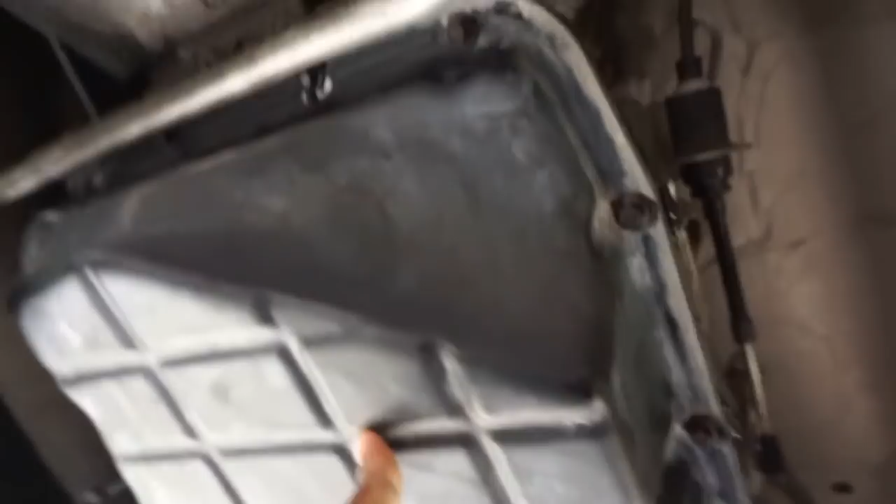All right, so we went ahead and put the oil pan on. When I say we, I mean me, but we put the transmission pan on, torqued all of the bolts down to 105 inch-pounds.

So today it is the next day. It's actually super nasty outside, all cloudy and stuff. Yesterday it was clear skies. So I'm gonna be pretty quick.

So I did not get to finish yesterday because I had some stuff to take care of. So I came out this morning, went ahead, and you guys saw me. I put, what is this, 2, 8 - I put 10 quarts of transmission fluid into the transmission initially.

So what I did was I'm gonna put 10 quarts in now. I'm also gonna go ahead and add some of this Hot Shot TSC additive.

So I did the math on this one. This is a 32 fluid ounce bottle. The 68RFE, at least for 2008, has a 17 quart capacity. The ratio for it is 15 quarts is 24 ounces, and 20 quarts is 32 ounces. We're adding 28 ounces - so I went right dead in the middle between 32 and 24, and that puts us at 28.

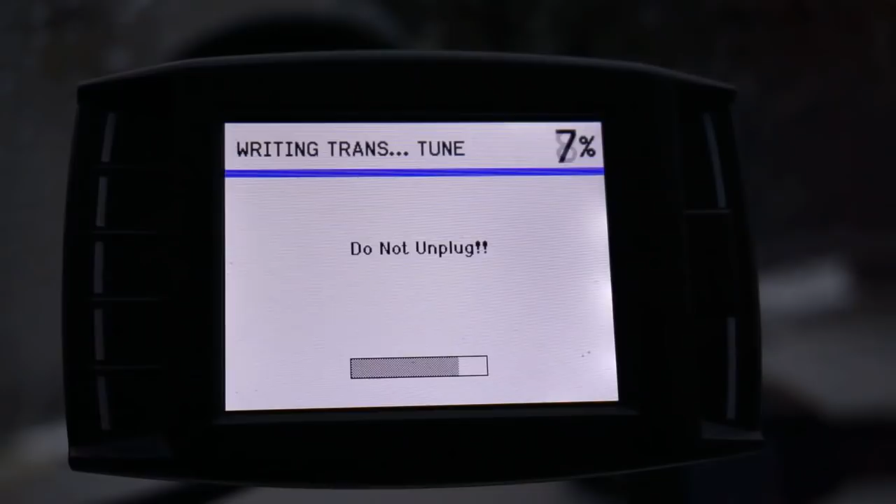That's all she wrote. We good. There we go, there we go.